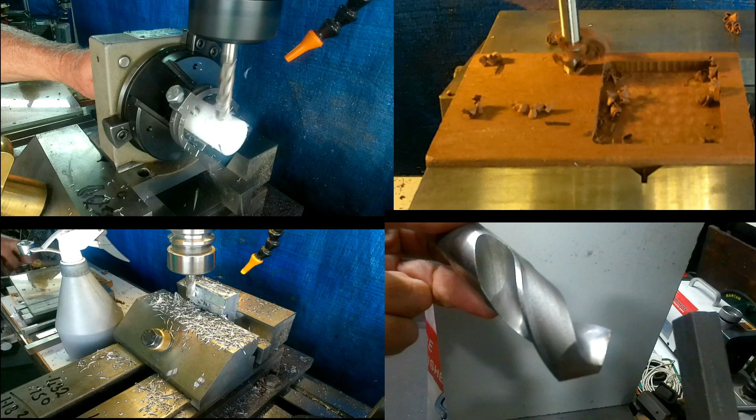Hello and welcome, and in today's video I shall be speaking and demonstrating 7 different methods of edge finding on a milling machine.

Now to start with, one of the most important things that you need to know, and quite often I suspect people disregard, is that the head of your milling machine must be fully trammed in to the bed in X and Y, so that not only do you end up with your holes and slots being perpendicular to the surface, but also if it's not trammed in properly, the edge finding will not be accurate. Now the reason I say that the edge finding may not be accurate is because generally edge finders are only 3 inches long and pretty close to the spindle.

So of course, you've found your edge, and then if you then need to either wind the head up or the table down, say 6 inches, to get a chuck and a drill or a reamer or whatever in, any error of the tramming will show up in inaccuracies of the hole positioning. As an instance, say your head was 1 minute out of perpendicular, which is a 60th of a degree. Not very much. You wouldn't be able to see it by eye. That will make a difference of nearly 2 thou over the 6-inch movement.

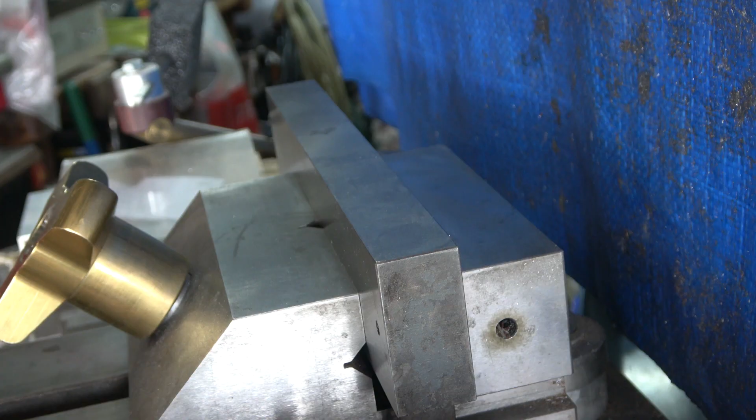Bye. Now, what I'm hoping to do with this video is to use what they're called chapters, so that after watching it, you can immediately jump back to a particular section that you liked, or if you know a lot of these methods, you can just skip to the ones that you're interested in. I've never done it before, so I'm hoping it's going to work.

The other thing I'm hoping to do is to use a second camera, because what I'm doing is a comparison between all these different methods to see what any errors are, and I'm hoping to use a second camera on the digital readout, and I'll then put it as a picture-in-picture. Hoping this all works. So without more ado, let me get started and set up on the first method, the pin and paper method.

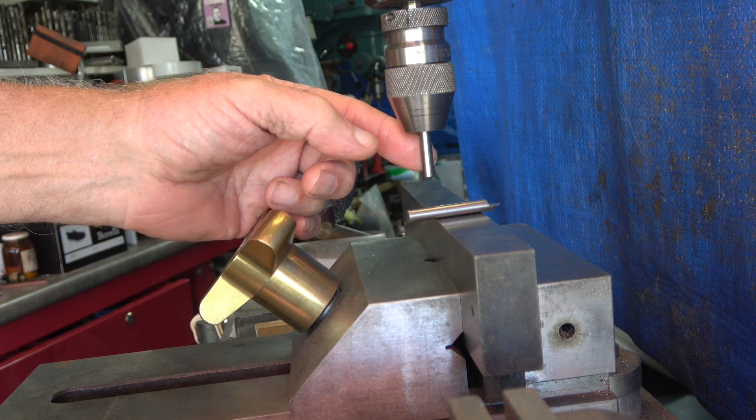So what's this pin and paper method, I can hear you saying? Well, what it is is a pin that can be, say, a dowel pin, a piece of high-speed steel tool, broken shank of an end mill, or even silver steel. It doesn't matter what it is, as long as it's straight, a known diameter, and got no burrs on the end. Now there's two that I use. I've got a piece of quarter high-speed steel tool steel for when I'm working in Imperial, or I've got a 6mm carbide shank of a broken end mill.

So the procedure is you can put it in either a collet or a drill chuck. I use my Albrecht drill chuck here because it's accurate. So the idea is determine what you're going to do. I should be working in Imperial, so I'm going to use this quarter piece of tool steel that goes into the chuck. Now the other thing you've got to bear in mind is that, by the way, with this method you don't have the machine running at all. It's got to be stationary.

So the idea is that you first bring it down to this, the edge that I'm trying to find. What's happened here? Oh, I've got the depth stop on. Right, bring that down to there, and visually just bring this up close to it, just to determine whether it is running out or not. So just bring it over and just physically do it, and twiddle and turn it round. Now, don't worry if there is a little bit of run out.

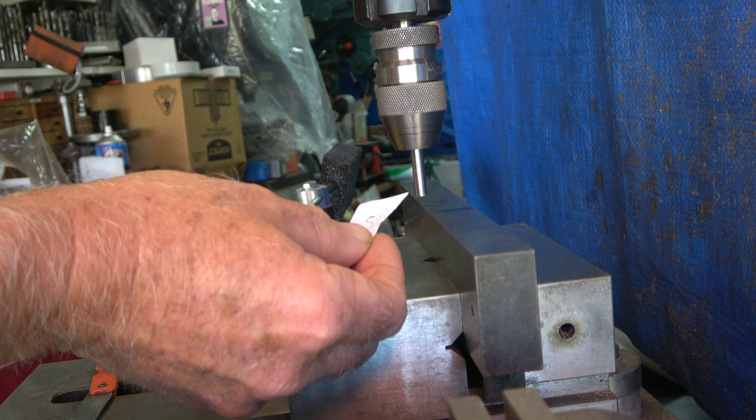But as I say, what we're actually going to do now is switch up to the DRO and show you what I'm going to do with that. So just bear with me a moment while I switch the other camera on. I'm hoping to film this as picture in picture, but apologies if it doesn't work.

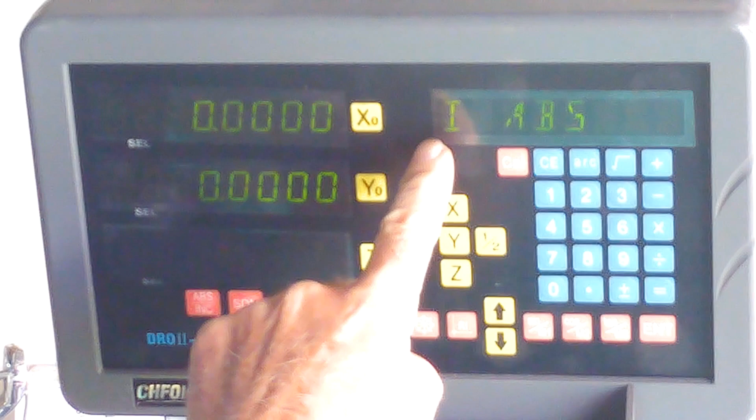So here we are up at the DRO. What you need to do first off is just zero it out. We should be working in Y, so just ignore the top one. The other thing we need to do is leave this in absolute mode, ABS. I should be working in imperial, and that's showing imperial on there. If it's not displayed, that's metric. So we need to make sure we're working in imperial.

So what we need to do now is wind this back so that it reads 129. So where are we? Oh, 100, that's too many. There we are, 100 and... come on, where are we? 129, coming up. Right, that's only a tenth out. We'll go back and actually get that right, we can get that better than that, seeing I'm demonstrating it. Come on. Oh, it's still there. Anyway, we'll call it.

So what we need to do now is zero that out. Now this is going to remain in this. I'm treating this pin method as the go-to standard, so each of the following methods that I'm going to show you will be in reference to this, showing whether it's more accurate or less accurate. So all other moves will be done in the incremental mode.

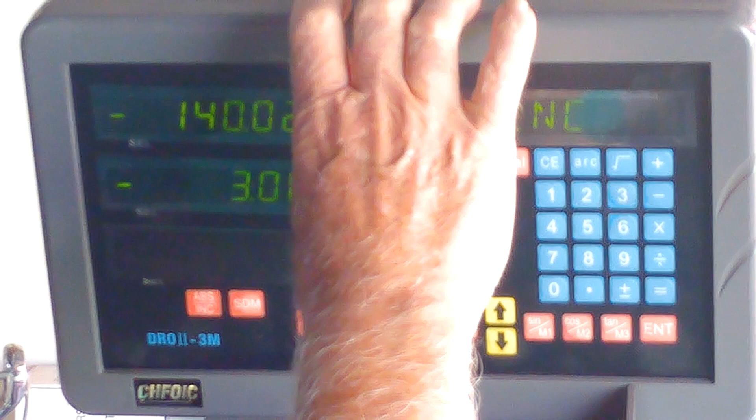That's a metric ball on there, 6mm, so we actually got to switch that to metric. We zero that out. Now this ball isn't exactly 6mm, it's 6.01, so I've now actually got to wind this over to 3.005. I've gone too far. There we are. Now zero that out again. Switch it back to imperial, because the pin was imperial to start with, and then switch it round back to absolute.

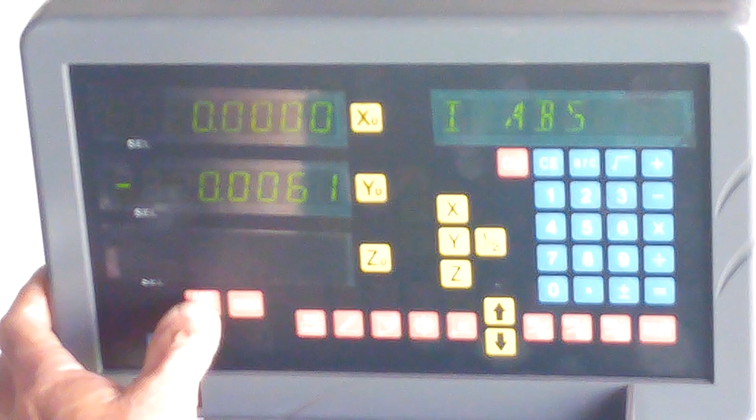And there we are, and that is showing minus 6 thou and a tenth. So what that actually means is that this reading reckons that it's 6 thou and a tenth closer to the part than the pin and paper one was. So as I say, this is just going to be an exercise for showing you all the different methods.

And by the way, each method that I'm showing increases in cost, whereas the first one wouldn't cost you anything. You know, pin out your drawer, bit of paper, and that's it. Then of course you've got to buy this, and then the next one up is a standard wobbler and so on. So just bear in mind that each different setting is costing more and more money.

So all I'm doing at the moment is I'm going to compare it. When I actually get to the end, I'll then show you a list as to which was the most accurate. So I think what we'll do now is we'll adjourn this bit and now go to the standard spring edge finder. So join me in a moment when I've got that set up. Bye for now.

So what you're now seeing here is a typical sprung edge finder. The tip has got a spring inside. The surfaces are lapped so that it can slide about, and they come in all sorts of shapes and sizes. I mean, this is a 10mm one, and there's one here that is only, I think, 0.2. Yeah, this is an imperial one, 0.2 of an inch. So different shapes and sizes.

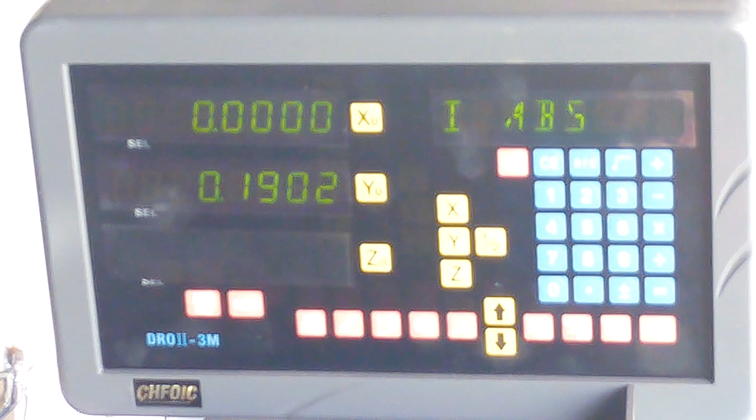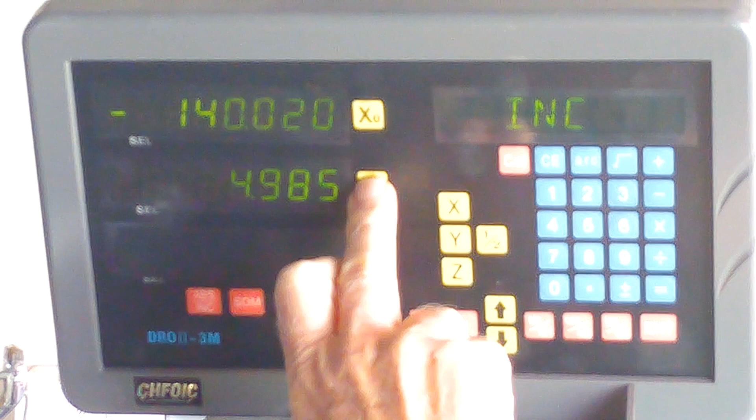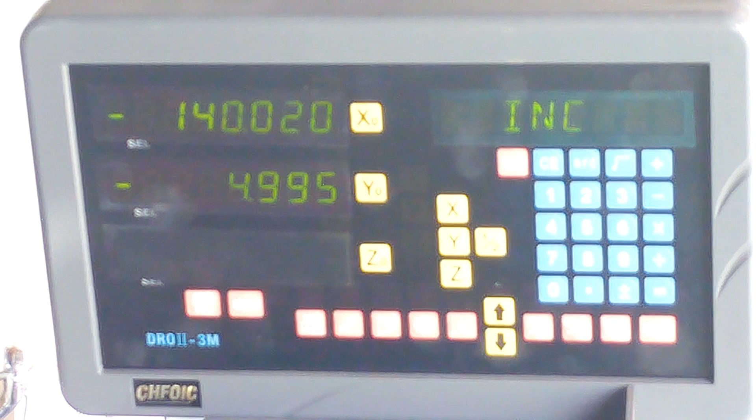Right, so here we are at the DRO again. So as I say, what we've got to do now is to ensure that we're in incremental. We need to be in metric because that's a 10mm edge finder. Zero the Y out, and now I'll move this over until it reads 5mm. Where are we? Now, 5mm. Zero that out again.

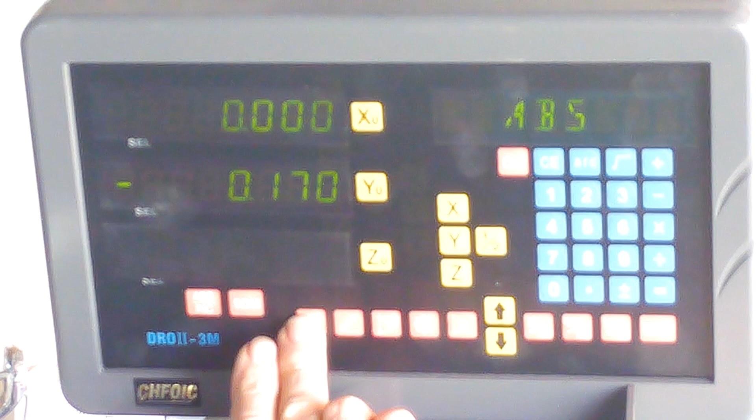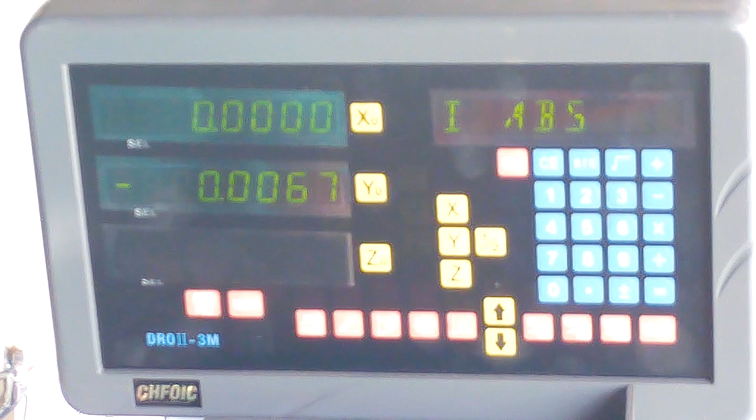Go back to absolute and in imperial. And again, that is showing a little bit more than the other one. That is now nearly 7 thou. That's 6 thou and 7/10. Right. Okay. So that's that little demonstration done on that.

So what I'll do now is I will switch over to method number 4, which is an electronic edge finder. Join me again after I've set it up. I'll see you soon. Bye.

Right, so what we now have in view here is an electronic edge finder. It's just a shank that goes up into a collet. It's got a battery up inside. There's a little LED inside, and this is the other contact. What happens is when this touches your part, it makes a circuit, and on comes the light. You see that light coming on, LED coming on.

Right, now this manufacturer says don't do it with the spindle running, and other manufacturers say yes, do it with the spindle running. I can't see why you mustn't have it running. I've done it in both methods, and to be honest, I find that with it actually running, I get a better reading by about a good thou. The other thing you've got to bear in mind is that this is delicate on the end. It's not sprung loaded like the other one. So if you go crashing this into your part, you're going to bend it, break it, whatever.

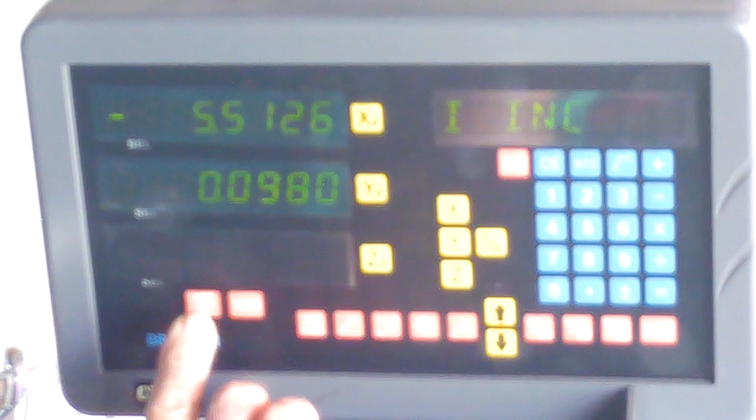Right, so here we are. We're back up at the DRO again. So what you've got to do is to make sure we're in incremental. We need to be in imperial this time because this is a 0.2 thingy on the end. Sorry, the brain's going here. So zero that out. So wind it over 0.1.

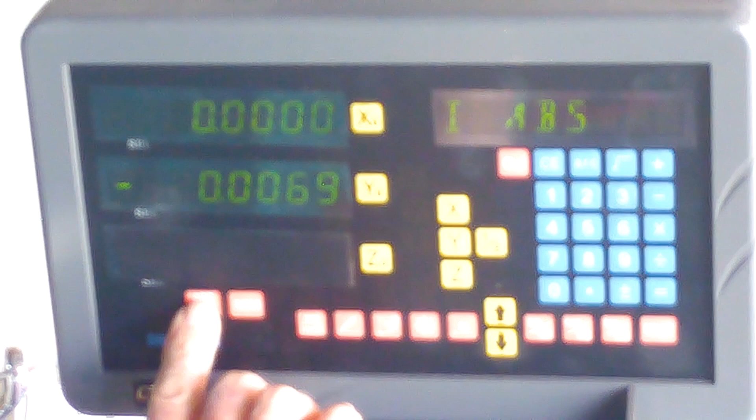Come on, here we are, nearly there. 0.1. Zero that out. Go back to absolute. And it's showing the error as nearly almost 7 thou. So, well, not error. This is showing the difference of 7 thou compared to the pen and paper.

What we're trying to say, at the end there'll be a list, and you'll see how it all ties up. So far the different methods are pretty close to each other, but not compared to the pen and paper. But anyway, we'll get back to that in due course. So that's the end of this little bit.

So the next one that I'm going to set up, and that'll take me a little while, is using a DTI and what they call a projected edge. So I shall be clocking up the edge with a DTI, but anyway, I'll explain it all.

Never mind. Right, over and out for now, and I'll join you again in a moment with the DTI one.

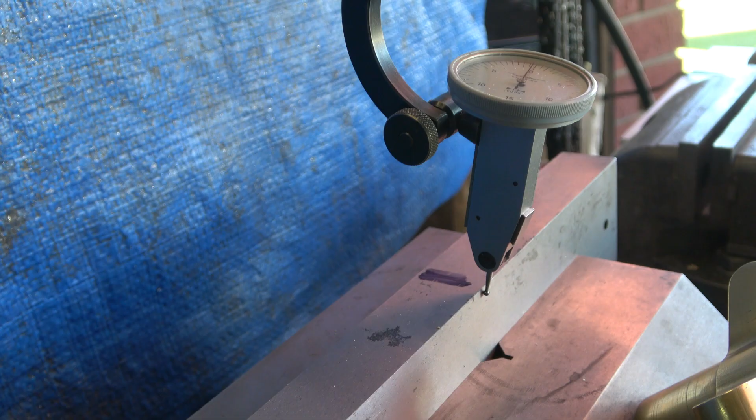Right, so what you're seeing in this setup, which is going to be called the projected edge method, uses a DTI, and the principle behind it is that you set this up so that the stylus at the bottom has got the minimum amount of runout, running as true as you can. And then what you actually need to do is to lower it down

and then turn this around until you get the lowest. Well, you turn it around first off, and then you bring the part over till you get a reading. It doesn't matter what it is, as long as you've got some reading on there, and then find the lowest point. Now you can't actually see that from there. I'll move the camera in a minute, but the idea is just showing you the principle. You've now found the lowest point, and you can set your dial on the top to 0.

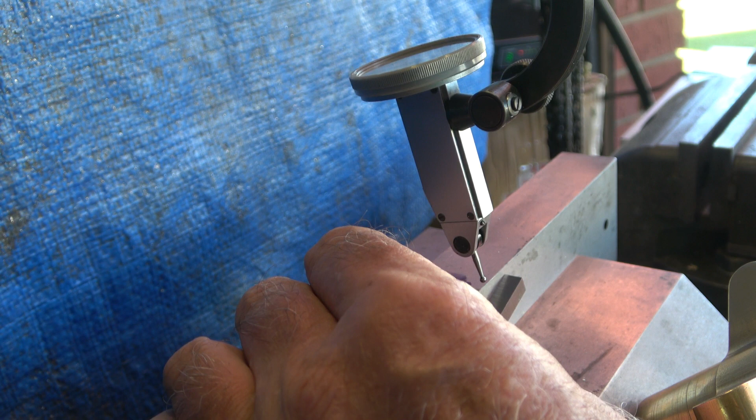You then move the indicator up, and then what you need to do now is turn this around 180 degrees to find the other side, but of course there isn't another side, so that's where the projected edge comes in. You get yourself a little parallel or a high-speed steel ground block or a Jo block, and the idea is that you lower this down a little bit more so that it's fairly near the top, and then you carefully push that onto the

keeping it firm against the edge, and then again adjust the indicator around to find the lowest point. It's like centering the hole: if it's not exactly right, you've got to adjust it half the difference, and keep going backwards and forwards until it reads right.

So what I'll do now is go through the motions again, but with the camera on, so you can see what the indicator is doing. So bear with me a moment, and I'll move the camera and zoom in a bit so you can see what's happening with the dial indicator. Right, so here we are with a close up of the setup.

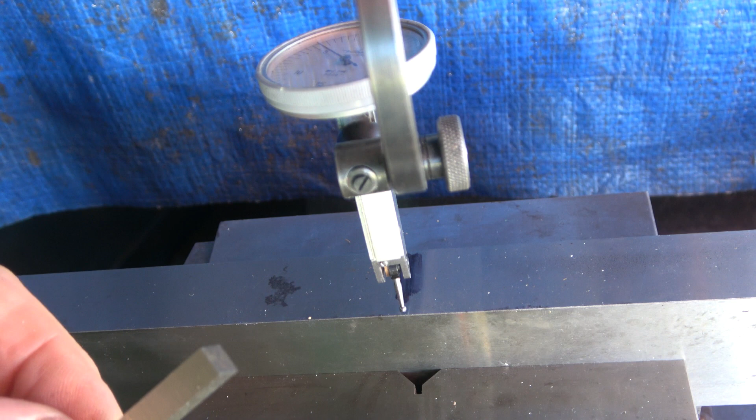It's down on the edge, and you swing this to and fro to find the lowest point, and it's about there. So we'd adjust that around to 0. You then move the indicator up, rotate it around 180 degrees. Be a little bit closer than that, and then using your Jo block or parallel, a known flat surface, you gently push that up against

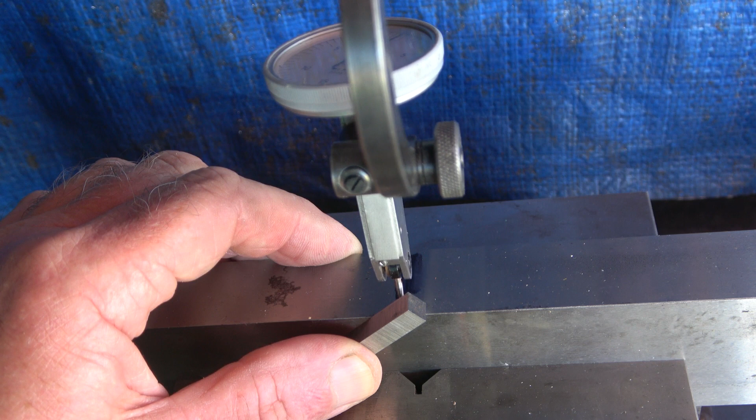there, and then rotate this round until we find the lowest point again, though of course you'll have a job to see it now. Now this is indicating, you can't see it from there, but it's indicating +1. So what I'll do is back this off by half a thou, and re-zero this.

Move that, rotate this 180 degrees, bring it down onto the part again, and find the difference again. Oh well, I don't know what's gone wrong there. We'll have to reset that. Perhaps there might have been a bit of dirt. You've got to be quite clean with this.

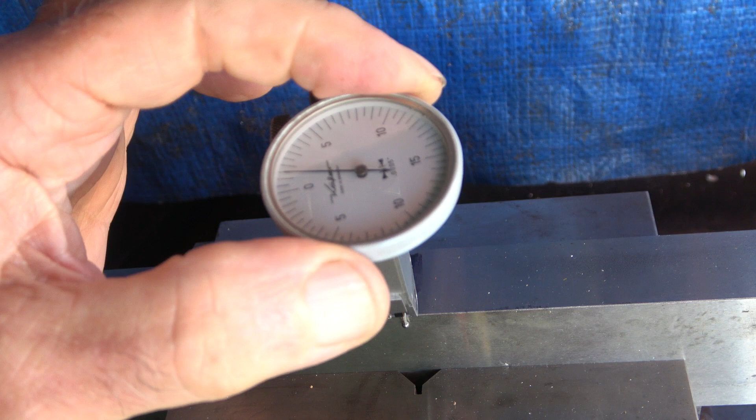So let's find that on there again. Sorry about that. It must have been a bit of dirt or something under it. So you've got to be extremely careful when doing this. You've got to rotate this around 180. I'll wipe that off. Move that down again so it's still above, and then carefully place it. As I say, it's a real fiddly setup, but it's one of the accurate ways of finding it.

Put it on there, and then tweak this round again to find the lowest point, and that is saying 6. So I've got to adjust that back to 3. Wrong way, adjust it round to 3.

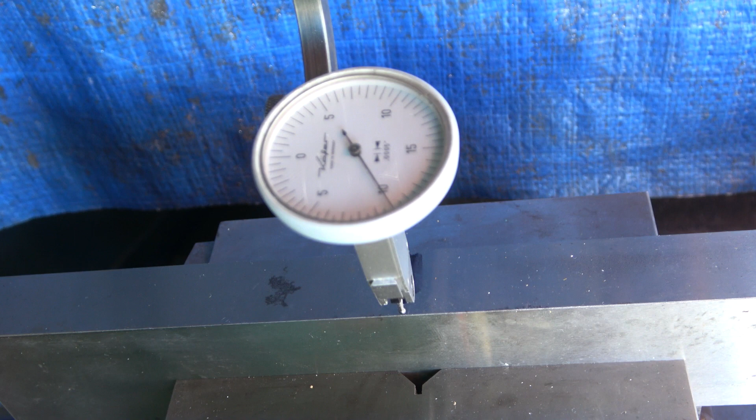Bring that round again, lower it down, and find the lowest point again.

Now this is number 6, the toolmaker's chair. Now this is a professional... let's try and get it in shot. This is a professional piece of equipment, oldie worldy, you know, from the 20th century. Probably not greatly used today. Heck of a job to find. Took me nearly a year to find this one, and it was over £100 second hand.

So what it actually is, is a precision ground and lapped block. This is a magnetic surface here, and this point here is exactly on the centre line of this. So the idea is you pop it on, make sure it's clear. It works on steel; it will work on non-magnetic, but you'll have to hold it, and it sits there like that.

So it works on the same principle as what we've just seen on the other one, except this time what we've got to do is sweep the gap to get equal distance. So we just have to fiddle with the setup. Right, sorry about that. Yes, it's like dialing in a hole. You've got to get your indicator in a rough position. So we've sort of got that so that it's about equal.

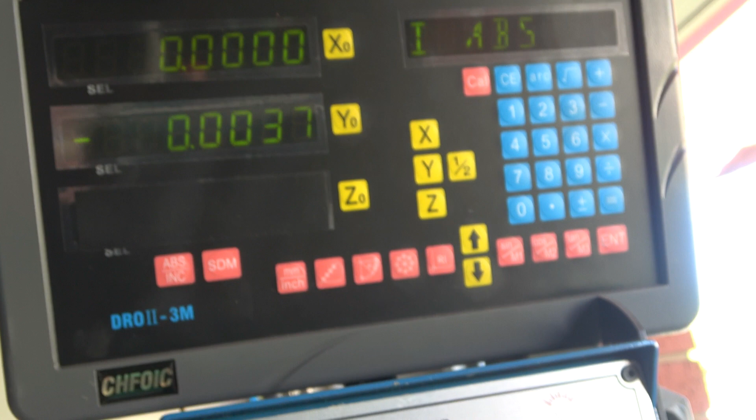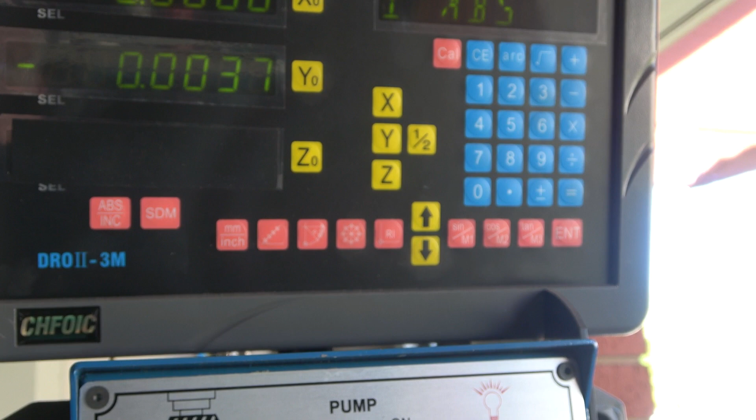Zero at the front, and like the last one, as you see, it's much quicker than fiddling about with the projected edge. Because this is actually visual. I've now glanced up at the DRO, and it is 3 thou and 7 tenths. But I know you won't believe me, so I'll move the camera up there and show you. Where are we? There we are. Absolute, Imperial, 0.0037. So that's that proved, so to speak. Well, that's that little bit done.

And so what we're doing now is to set up for the final one, which is a Swiss-made optical centering microscope.

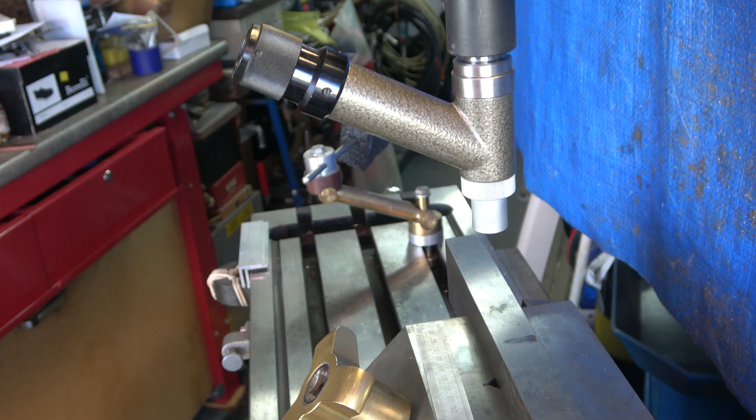Now what you're seeing here in this final setup is a Swiss-made Isoma centering microscope. It's a powerful microscope that's got a graticule in the bottom with crosshairs and circles, and all you do is look down there and line your edge up on the centre line of the crosshairs. Unfortunately, I can't show you anything because I can only just get my eye in there to see it. So you'll have to take my word for it.

But as I say, all you do is get it in focus, and then wind your table to and fro until you find the edge. Of course, if you want to, you can find a corner with it, because you've got a centre point, you've got crosshairs on it. That's all I can say about it.

Comes from the 1960s or so, arm and a leg to buy. I've had a look on eBay, and I can only find 2 available in the world, and they're over $1,000 that they're asking for second hand. So the chances of you finding one are probably extremely slim.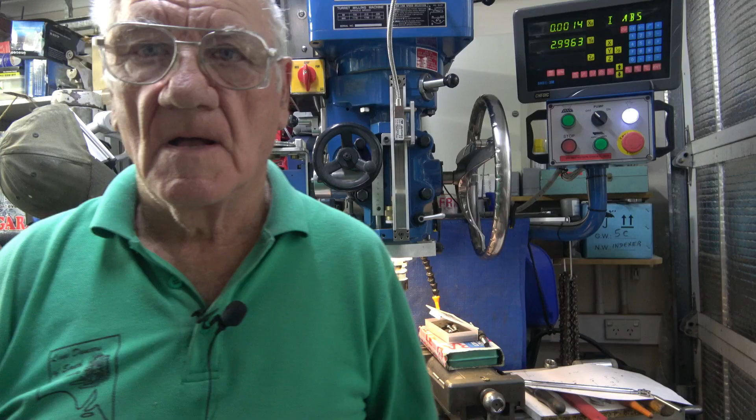So here we are again. In conclusion, I decided to stay out here since the camera was all set up, rather than bother to take it all in the house and set it all up in there. So here we are. So in conclusion, what have we learned? Well, there's the results.

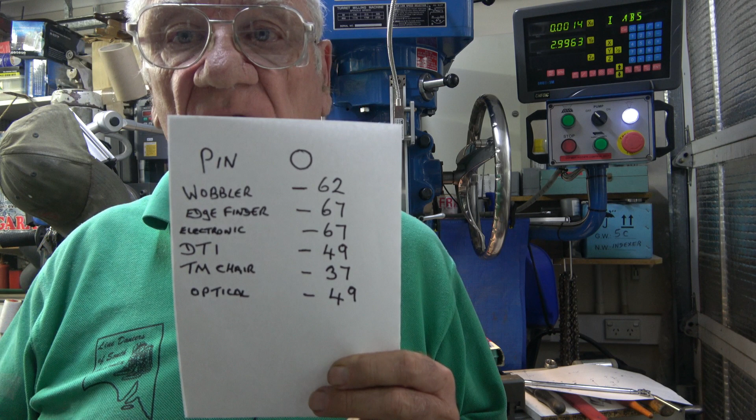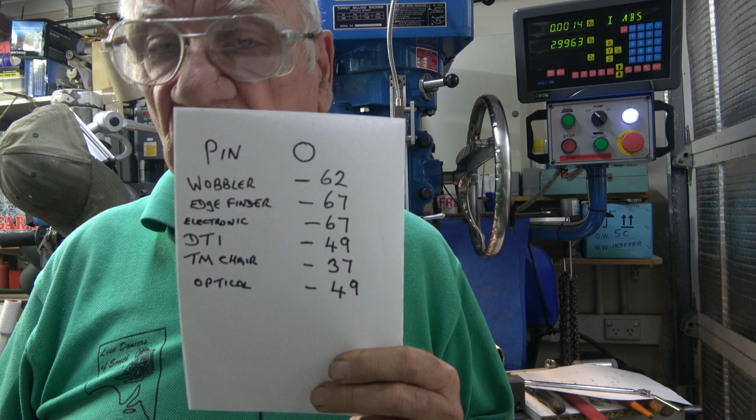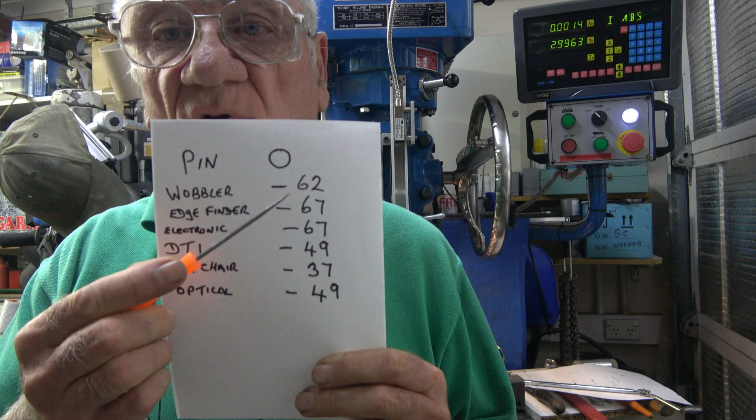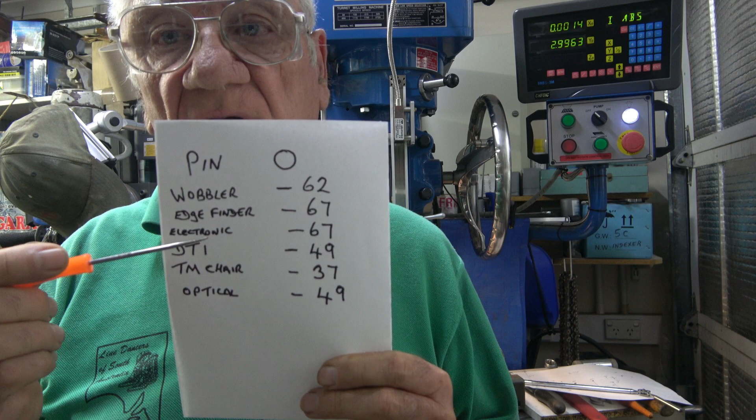Just to recall, the pin and paper was set up just as a known reference point, and then all the other measurements were taken from it. Now these are in thous. So although it says 62, that is 6.2 thou. And all the measurements are minus, which means that these items said that it was closer to the edge than what the pin was.

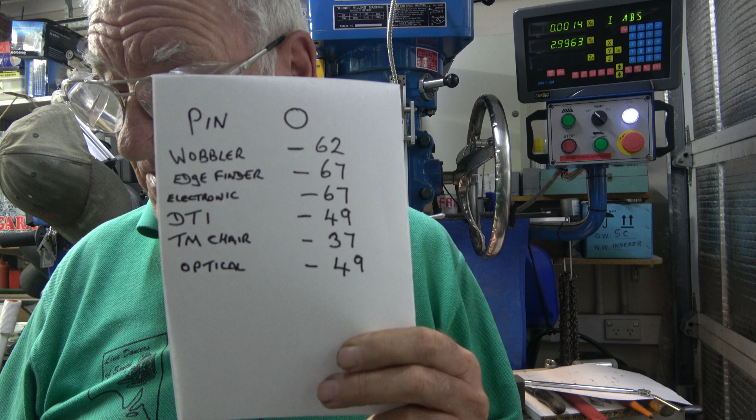So as I said, we've got the wobbler 6.2 thou, the standard edge finder and electronic edge finder 6 thou and 7/10. The DTI, that was the projected surface, in case you remember what that's about. That one was the second most accurate. That is 4 thou and 9/10. The most accurate one is the toolmaker's chair. That was only 3 thou and 7/10. And lastly was the optical, which is 4 thou and 9/10.

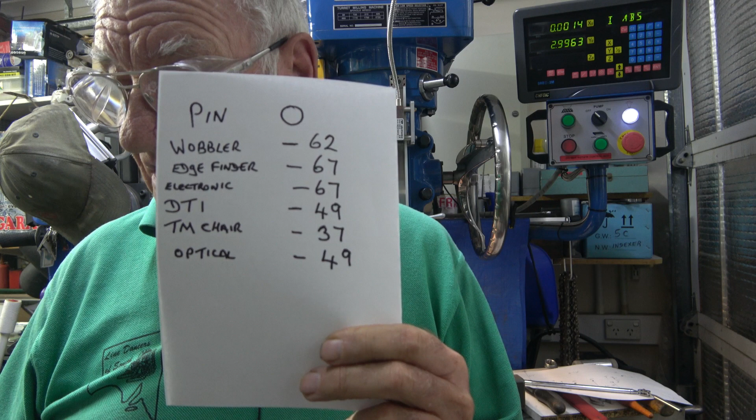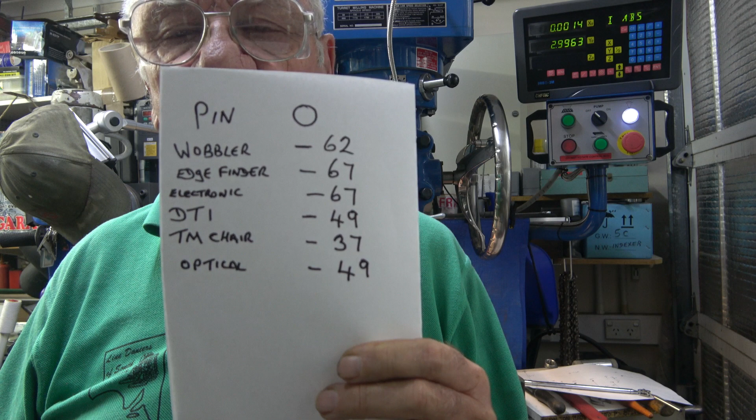So as you see, they're pretty close, and in fact, there's no doubt you found yourself using a wobbler or an edge finder, and sometimes they don't always kick off at the same point. You've done it, it's kicked off, you've set your DRO, and you think, I'll just try it a second time, and you get a totally different reading. So you reset it again, try it perhaps a third time and get a different reading again. So as I say, the edge finders are not particularly reliable.

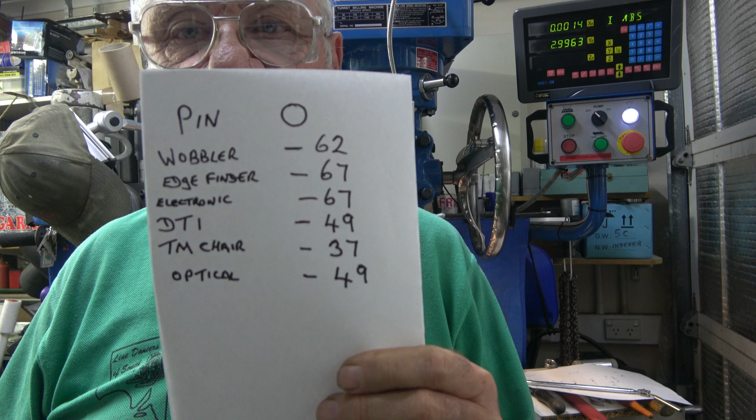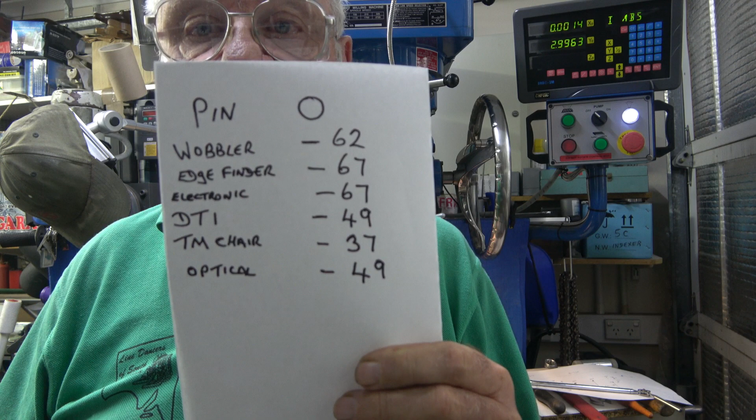So your best bet, if you really want accuracy, is a toolmaker's chair. But like I say, you might have a job to find one, and it'll cost you an arm and a leg as well. Now I forgot to mention in the video, the first four, the pin, the wobbler, and the edge finders, were all mechanical. So once they've kicked off, you set your DRO and then wound it over half the diameter, whatever the diameter was. So of course, you've removed any backlash.

Now the electronic edge and DTI, yes, you've found it visually, but you've no idea where your lead screws are. One might be plus, one might be minus, whatever. So you really ought to back it off, take out the backlash, and then bring it back up to the same reading on the dial on the DTI, and then reset the dial. I explained this in a previous video, I forget what it's called. Was it getting to know your backlash, something like that?

And lastly the optical one. Although it's optical, it's mechanical. So just make sure that when you're lining up the crosshairs on the graticule, you've taken your backlash out in whatever way takes your fancy. So I hope that's enlightened you a little bit as to the different methods of finding an edge.